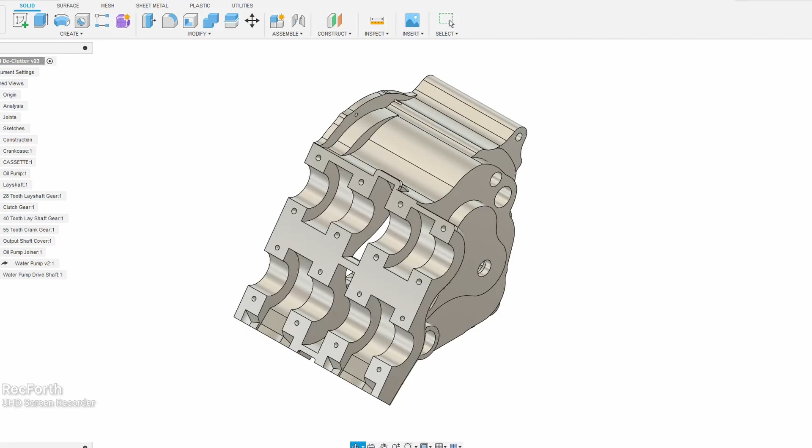And for those interested in the 350cc V4 two-stroke build, that is definitely happening. I'm getting parts showing up all the time, and so far I've modelled the two halves of the crankcase, the cassette, designed my own oil pump, the lay shaft, the water pump drive, and the water pump.

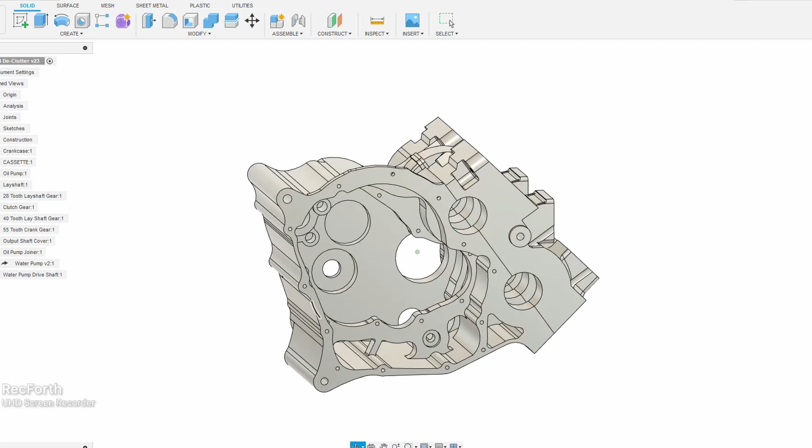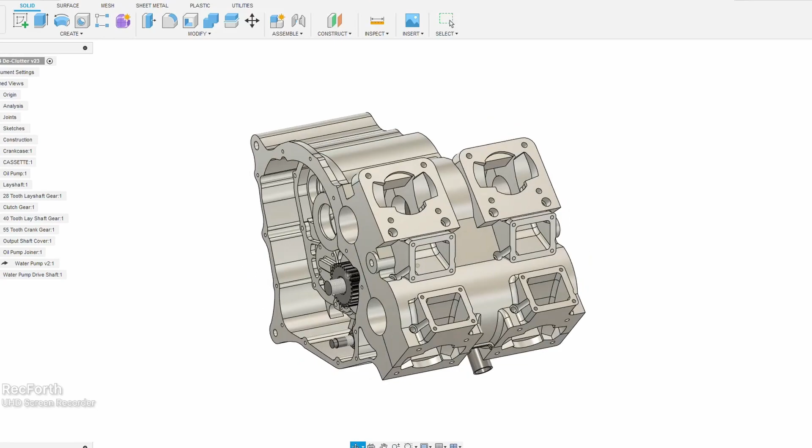The water pump is actually off of a GSXR 1000, you'll see it in a sec. And that oil pump, it's actually modified internals from a Honda C50, and that will feed the innards of the input-output shaft. But otherwise, it's definitely happening, and I've got a plan for how I'm going to manufacture it, so stay tuned. This is definitely worthy of its own video.

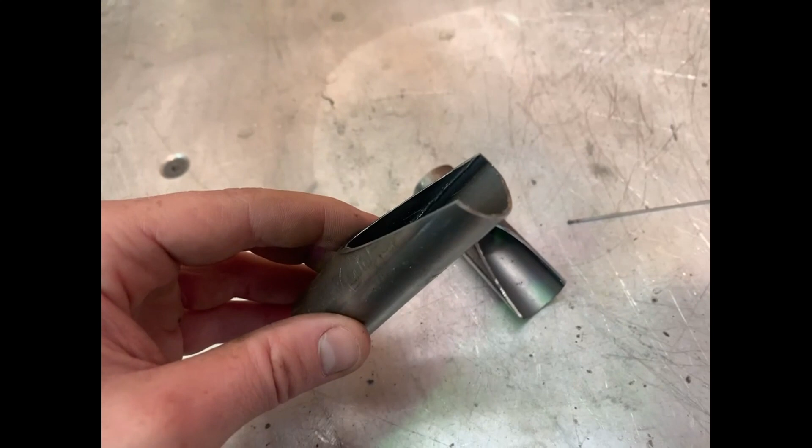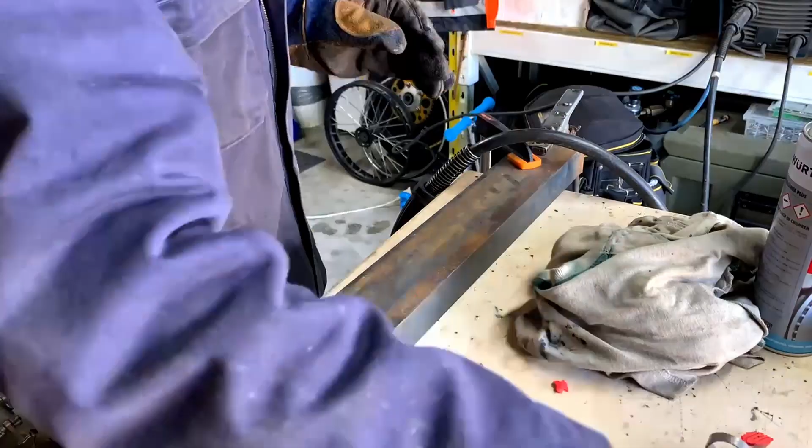So what you're looking at here is a bit of 28mm pipe. I freehanded it with an angle grinder, TIG welded it - not my best work, but it'll do - and made up a small collector. From there, I fabricated the rest of the exhaust out of the same 28mm tube. I just cut opposite 15-degree angles on the bandsaw, probably about a dozen of them, and used them for all my 90 degrees, just little pie cuts.

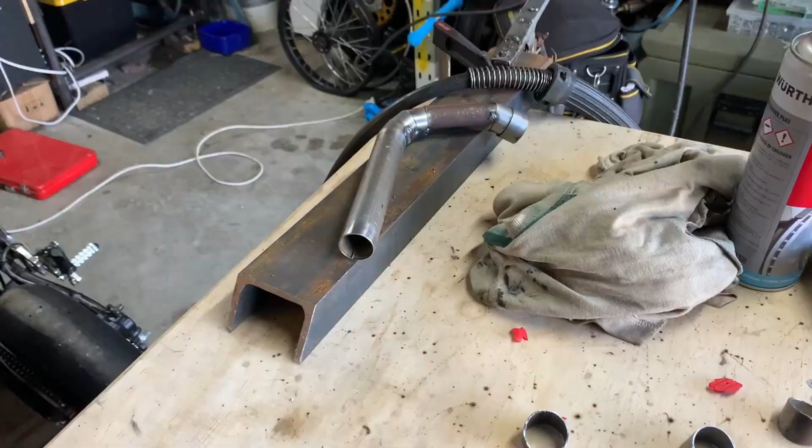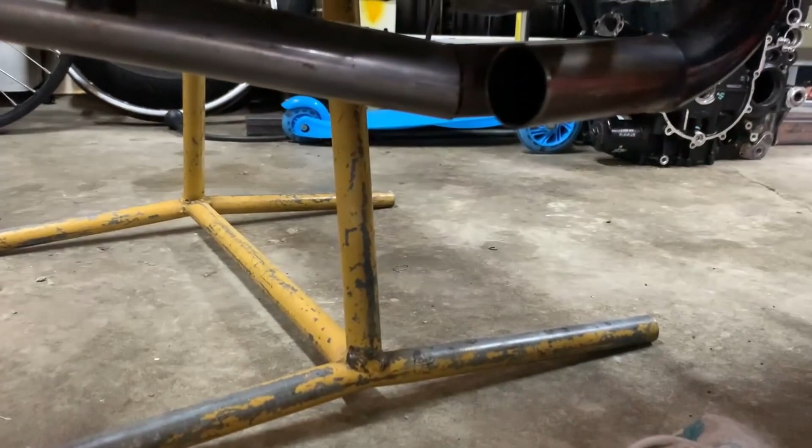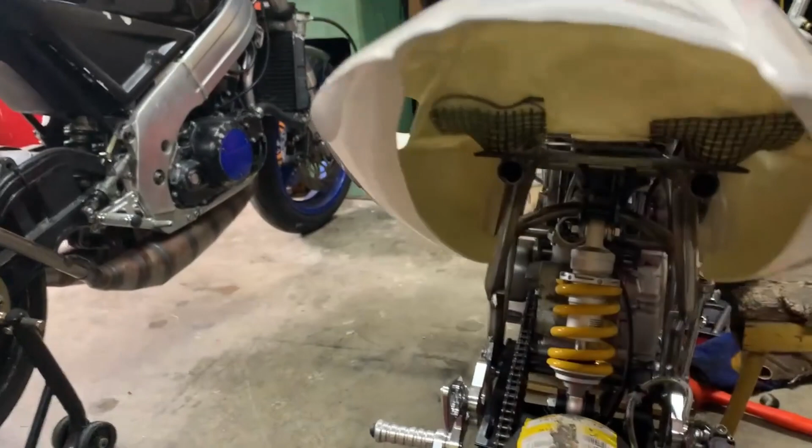Easy to do, and then I'm just freehanding it as I go. I just need to connect this piece to the collector there. This pipe here needs to come up and out under the seat. The plan is to mount this muffler like so. So it looks pretty sick. I'll probably make a little bracket to attach to this off of where the tail unit bolts to.

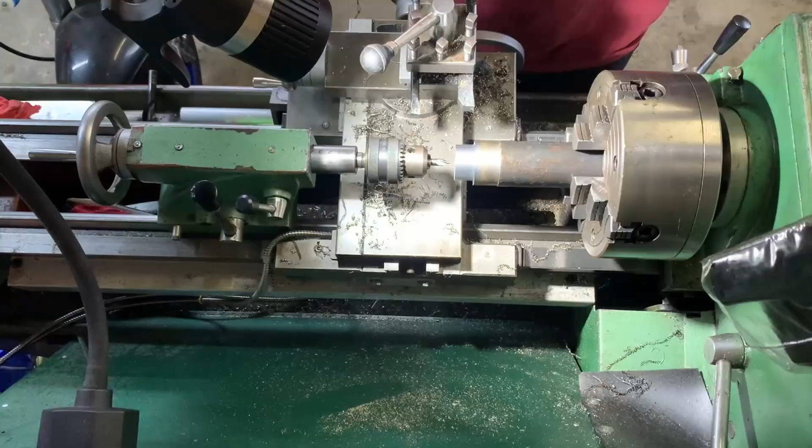So the next thing I had to do was make a small sleeve on the lathe. From there I drilled it, bored it, and then machined down the OD. The purpose of this part is so I can have a join in the exhaust, as it'll be almost impossible once fully welded to install it on the bike in one piece.

So the plan is weld this, cut the pipe in half, slip this over, do a weld the whole way around, and then use springs to clamp the pipe together like many other motorcycles, and it should just seal based on the fit. There might be a small exhaust leak, but I am not too fussed.

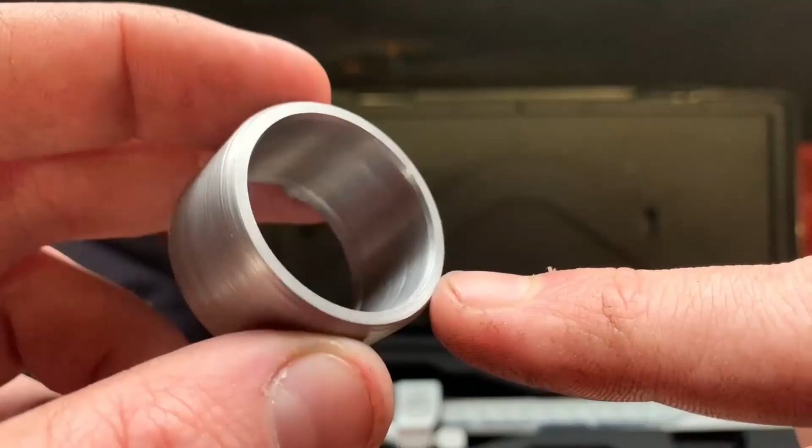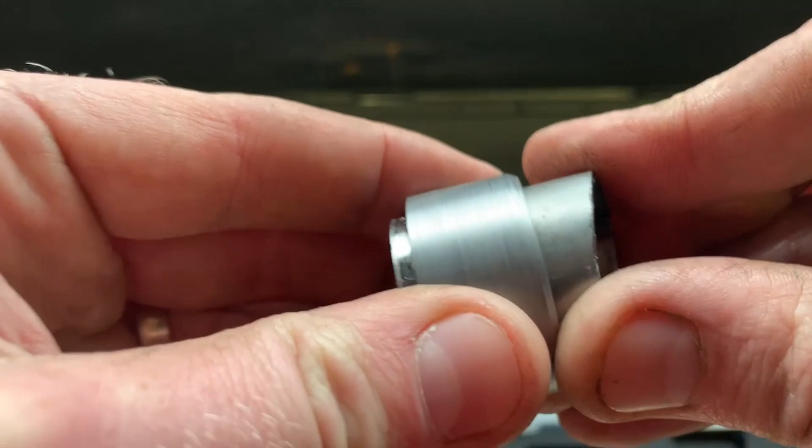So here's the finished part. A couple of features - a little freehand chamfer there, and then I took an extra 0.1 off, and as it was auto feeding, I wound it off so it actually slides in easy for the first 10mm, and then it gets very tight as it's a 0.02 clearance fit. That should be pretty good at self-sealing on the exhaust.

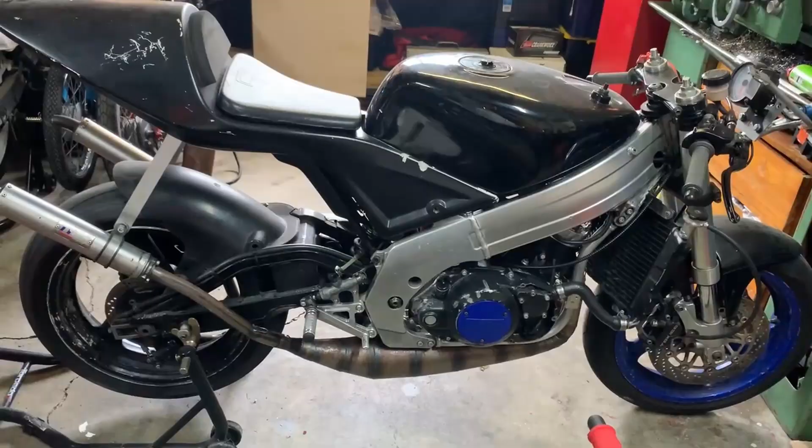Last time out at the track, I also took out the RGV, working on the jetting. I didn't have enough jets for it, so I rode the bike up and down the street with a 120 main jet in there, and it rips. Wheelies, first, second, sometimes into third gear.

But I didn't know if it was on the cusp of being too lean, so what I did was slapped a 150 in there and then worked my way back down. But I only had a 135 as my smallest jet, and then the next smallest jet was 120, so I wanted to try at least a 130 and a 125.

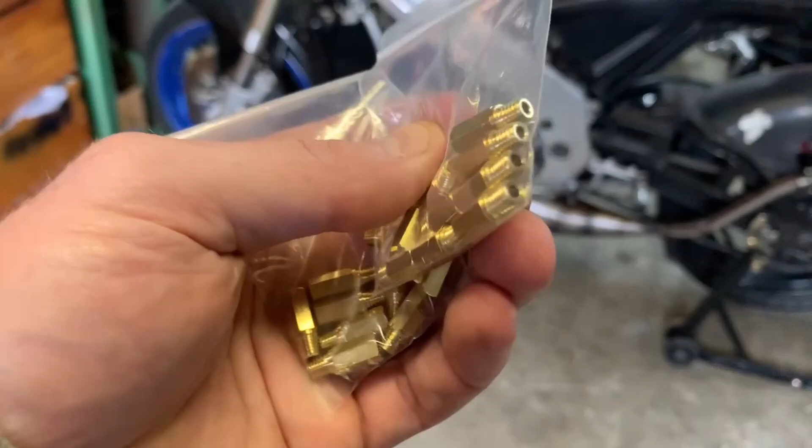China saved the day again. I think these are about $7 a bag, and they showed up in a week. So at that first meet, at lunchtime, I'll see if they'll let me take the bike out with a 130 in there and then a 125, and hopefully I can get some proper track time on this once the jetting is dialed in.